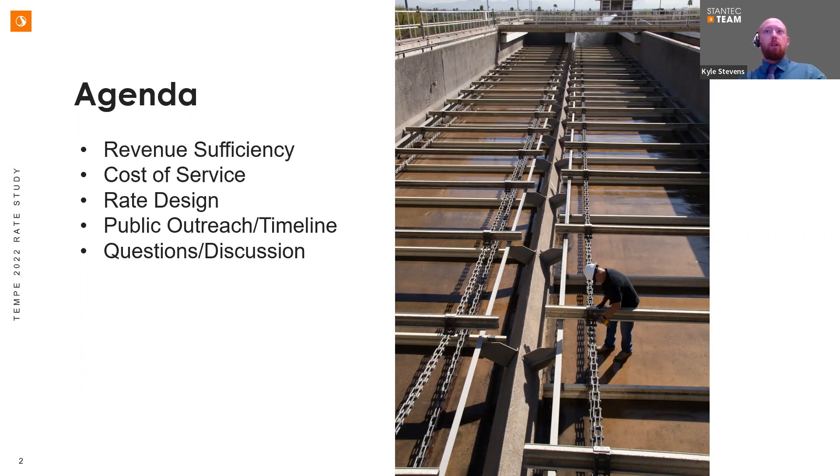The best way to think about a rate study is it's really fundamentally a series of interconnected investigations. We first start with revenue sufficiency, which is just a fancy way of saying how much do things cost. We'll gather detailed information from the city on operations, capital, and debt costs on an annual basis, then project that forward for 10 years to understand how those costs are anticipated to change over time and how rates would need to reflect that.

Then we'll move into the cost allocation process. What we're doing here is figuring out where those costs that we've identified need to be recovered from customers. There are no taxes in water and wastewater paying for anything - it's all charges for services.

We look at a detailed x-ray of expenditures to determine what are the cost drivers for the utility. The city has a great repository of data relating to how customers actually use the system, and we use that data to figure out where costs should be connected and recovered from customer classes. Finally, we'll talk about rate design - the actual design and configuration of the rates charged to customers that you'll see on your utility bill, generating the charges due based on services provided.

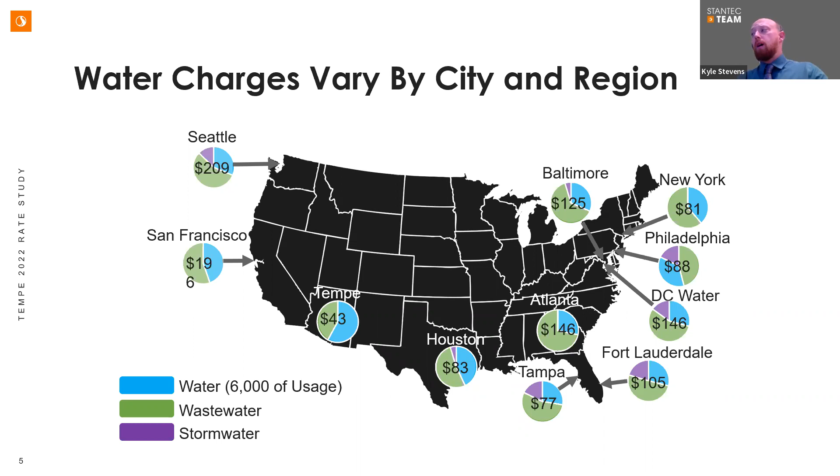All of that goes into essentially creating one number - the total amount of revenue required for the utility. We'll look at that not only in the current budget year, but projecting on a go-forward basis so we can understand and anticipate any changes to that cost that may occur in the next 5 or 10 years.

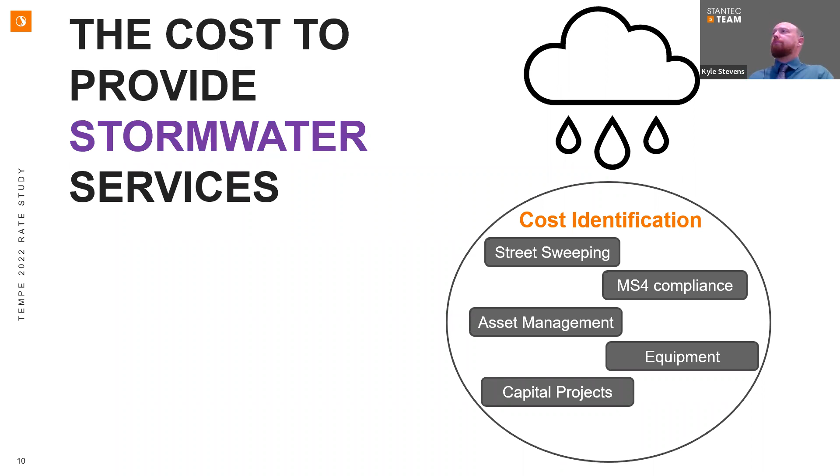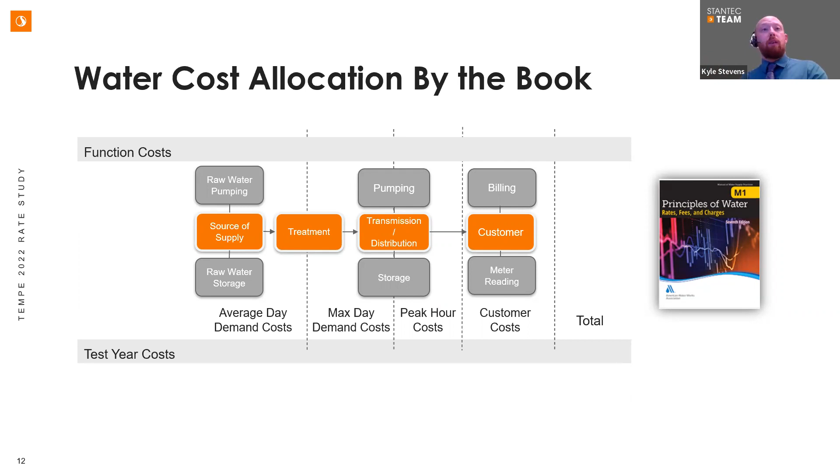With regards to the cost allocation process, you can identify those costs and the way that the city is meeting it through average or max day demands. One key item that Tempe has, that many other communities don't currently, is really detailed customer data. The advanced metering infrastructure is providing millions of data points for us to analyze, which allows us to be thorough, thoughtful, and accurate in allocating costs and connecting that to how customers are actually using the system.

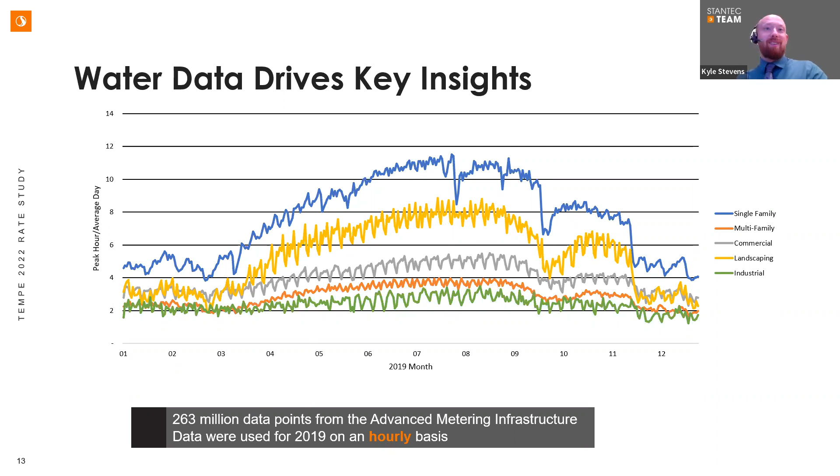Switching gears to the wastewater side: from a cost allocation standpoint, this will be new to this study. We haven't conducted a wastewater cost of service study in a number of years, but we will as part of this study. Wastewater cost allocation is a bit different.

On the wastewater side we're looking at three parameters. One is the total amount of wastewater, the flow. The next is the strength, which in the industry is defined by COD and TSS - chemical oxygen demand and total suspended solids. These are ways to quantify the strength, or what's in the wastewater, and how much it costs to treat it before disposal.

This analysis will help us true up and understand the cost of wastewater services. Tempe is also bringing another great data component here with a customer sampling study, looking at different customer classes and the wastewater strength they supply to the system that then needs to be treated. So much like the water side, we'll have a comparable data source to divide those costs up as accurately and proportionally as possible.

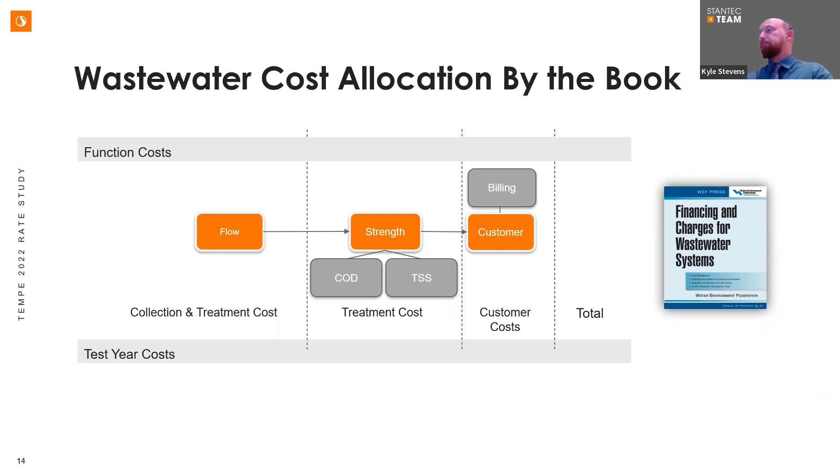Now we'll move on to the final part of the rate study. Once we've identified how much money we need and which customer class it's coming from, we'll talk about the different elements of rate design and what goes into creating rates. First is the idea of balancing objectives. When we go into rate design, it's helpful to keep in mind that we're finding a middle path between multiple objectives that can often be competing.

What do I mean by that? One objective is simplicity - often we want simple and understandable rates. You could imagine charging a flat rate, the same rate to everyone, but I'd argue that's not as proportional as we want. Another competing goal is making rates sensitive enough to pick up how customers are using services and allow the bill to change based on that use.

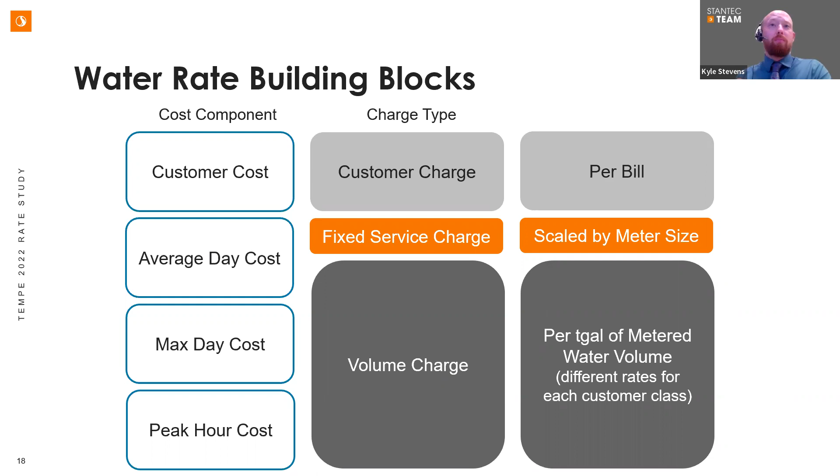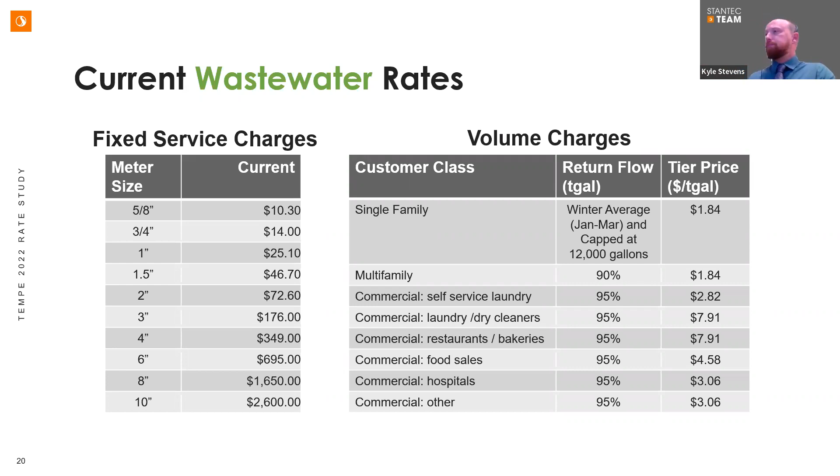Now, as we go through the study and have any recommendations, we oftentimes will have a graphic like this that will compare what the new rates would look like as well.

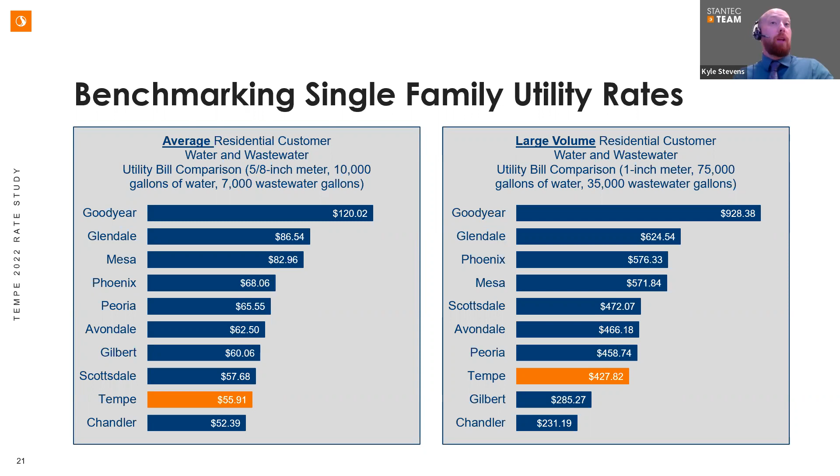So with regards to changing gears from water to wastewater, stormwater, the new one that's been added to this particular rate study, I'm going to use a little bit of different terminology here.

So once we've identified cost, what we are looking to do as part of this study is to provide the community and council with essentially several options in which a policy direction could be made in how to recover stormwater costs. Stormwater costs and fees for other municipalities often take a deep analysis into looking at essentially a standalone fee.

We want it to have several characteristics. We want it to be fair, equitable, simple to administer, defensible, have an easy understanding, and then we want to also consider the locally available data. And the way that we measure stormwater usage is very different oftentimes than water or wastewater.

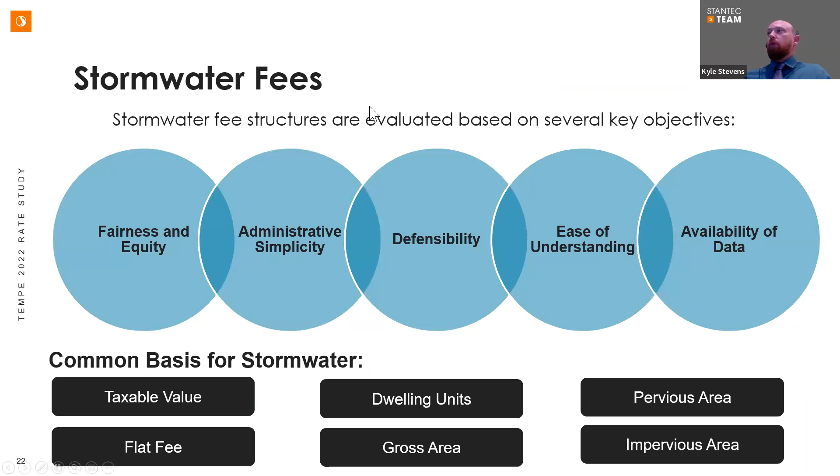When you look at tier 1, for instance, that 0 to 6,000, those demands are very steady throughout the year. Those demands are oftentimes associated with indoor usage. When we go into the higher tiers, those will have very seasonal changes in usage, more of those peak demands. This costing is directly mathematically related to the cost the utility incurs on an annual basis to ensure that service is available year round. I make that distinction because that's oftentimes not the case around the country, where communities don't have this type of data available to connect the cost in such a linear way.

So my follow-up to that is you're being very clear that the cost is associated with the utility burden. However, it does not appear to be accounting for the environmental burden that these high water users are putting on the system. So my question is, for only 50 cents more, how much water is being used?

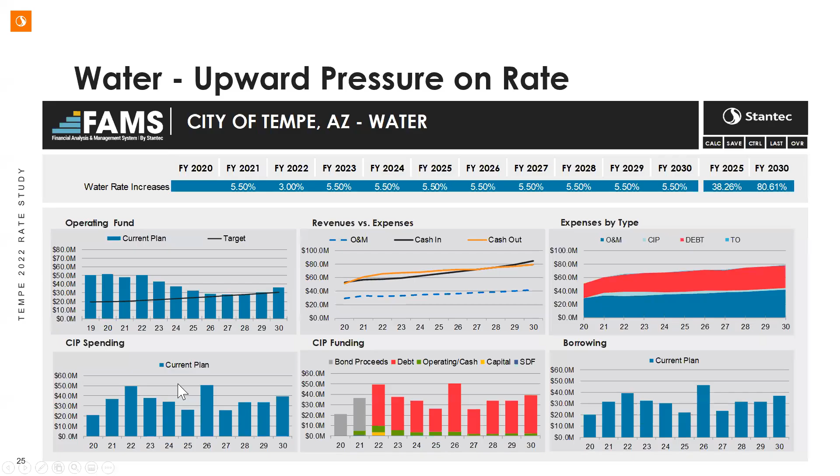It seems to me that it's more focused at encouraging equitable rates and not so much towards encouraging conservation. When I think about equitable, a lot of times you think about low water usage or lower usage of whatever it may be. But in the case of water, when I think about equitable, I think about, are the high water usage customers getting away with using more water for cheaper? So when you look at these rates, what I see is exactly that. It appears that 40,000 gallons a month is getting water much, much cheaper than the 0 to 6,000 gallons. So is the goal to ensure that equity in the rates, or is the goal to encourage conservation?

And I do understand that. I guess what I would like to see the city of Tempe do is encourage those high usage customers to use less water. And I think it's easy to say, right? But I think one of the ways that we can do that as a city is to up the fees per 1,000 gallons to a price that's, and I'm doing very quick math here, so if you're 5,000 gallons a month compared to 40,000 gallons a month, in my brain, that needs to be 8 times higher, right? 5 times 8 is 40,000. And that's not how it's set. I understand that there are some cost of production in there, and that's what the rates are based on. But I would like to see the city of Tempe encourage conservation through rates.

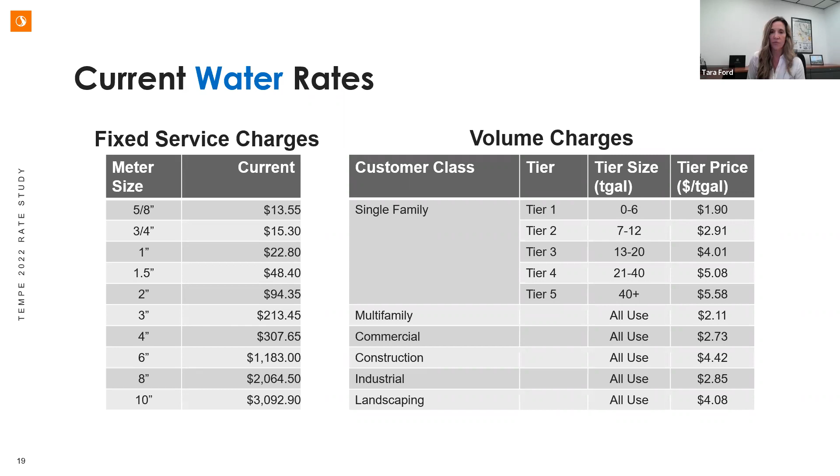Thanks, Tara. Okay, there's a question from Philip: will there be a way to account for water used in gardens and other such uses in a single family unit that can be subtracted from wastewater calculations? I believe there may already be such a process, but it may not be widely known by the public.

I'd be happy to comment on that from a single family customer standpoint. Tempe uses a couple different mechanisms to ensure we're billing as equitably as possible on the wastewater side. First is winter averaging, only looking at usage occurring in January, February, and March. Second is using return flow, only billing for 70% of the usage in those months. Third is capping the total wastewater volume billed for single family at 12,000 gallons monthly. Through those three mechanisms, we try to account for outdoor usage that may not come back to the system.

Kyle, I might add to that. I think Philip is also referring to a form you used to be able to fill out if you had outdoor water use or a certain amount of turf. That form, and the ability to take into account your outdoor water use during winter average, went away when we capped it at 12,000 gallons for return flow.

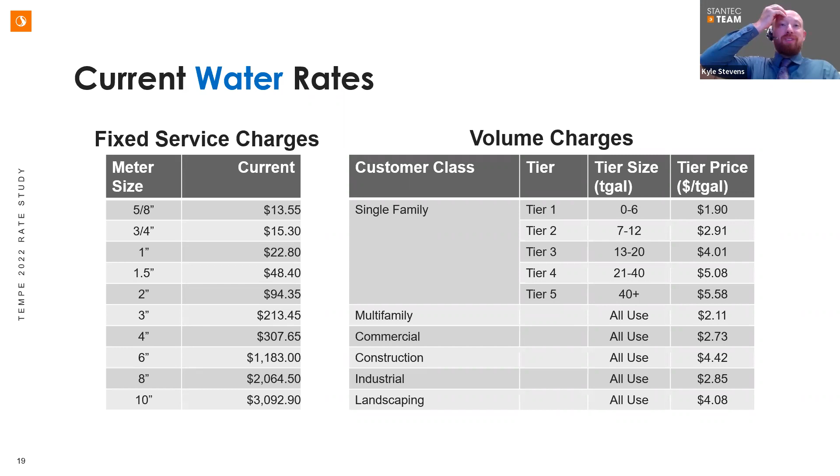I think the only other question was the policing. I think the determination on customer classes is made upon installing, with the actual physical infrastructure connection to the system, and then they're placed into that landscape category. So is that a class that is not normally used in the single family class? So you can't be a landscape class and a single family class. Is that my understanding?

Actually, single family customers could choose to install a landscape meter. It becomes a little cost prohibitive though, because you have to pay system development fees whenever you get a water permit, pay for the meter, pay system development fees, and pay tap fees because they have to tap the main. So you're looking at a lot of upfront costs to add a landscape meter to a single family resident. But if you were to do that, you could. There's no rule against doing that.

I'm going to circle back to conservation again, based on what we just talked about. In the case of a 40,000 gallon a month single family household, where are those 40,000 gallons going? Are they going into a pool? Are they going into a fountain? Are they going onto turf? Are they going into landscaping?

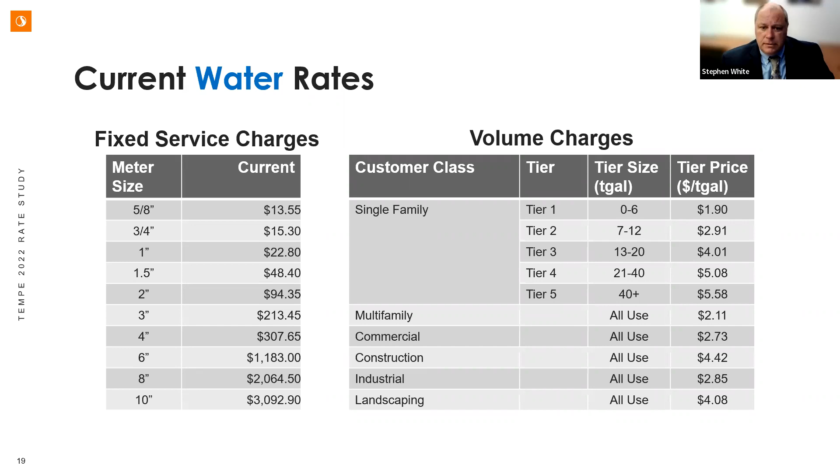I would say that would be very individual based on the customer, the single family customer. So could you encourage a 40,000 gallon a month customer to decrease usage by putting them on a landscape customer class instead of their single family tier 5 class, or perhaps in addition to their single family tier 5 class?

The landscape meter, just to be clear, is totally different. It's as if you have a standalone meter that's just serving those outdoor demands, and then they would have an additional meter in the case of a single family home that would be serving the house. So they would actually have to have two separate meters to qualify for that classification.

Perfect, okay, that's good, that's excellent. That clarifies a couple of things there. So the 40,000 gallons a month is probably going into a pool or being used within the household, not necessarily on turf. Maybe one way I could answer that, and again, I think Steve's exactly right, it's individualized where that water goes.

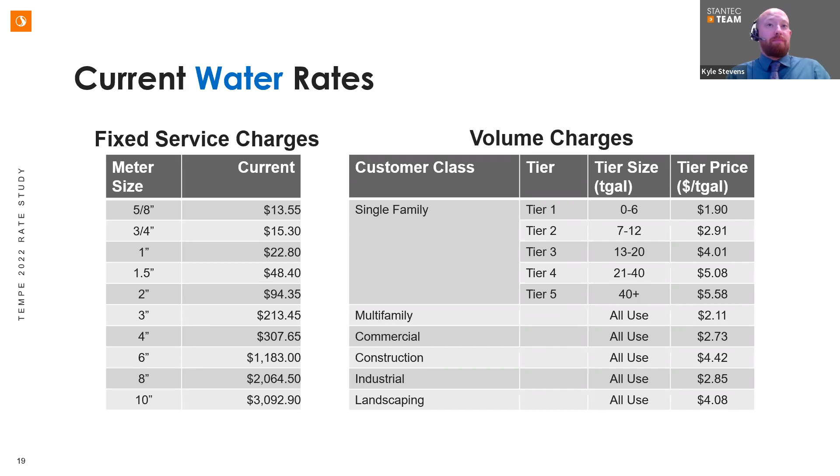Thank you, guys. And I will kind of echo Kendon again, and I don't mean to keep following Kendon, but my questions are also not out of anger or out of, I'm not trying to do a gotcha. This is a very, very timely study. I think that Tempe has an opportunity to not only keep their lead in conservation, but jump light years ahead with this study. So I'm very encouraged to see this, and I look forward to the next few months.